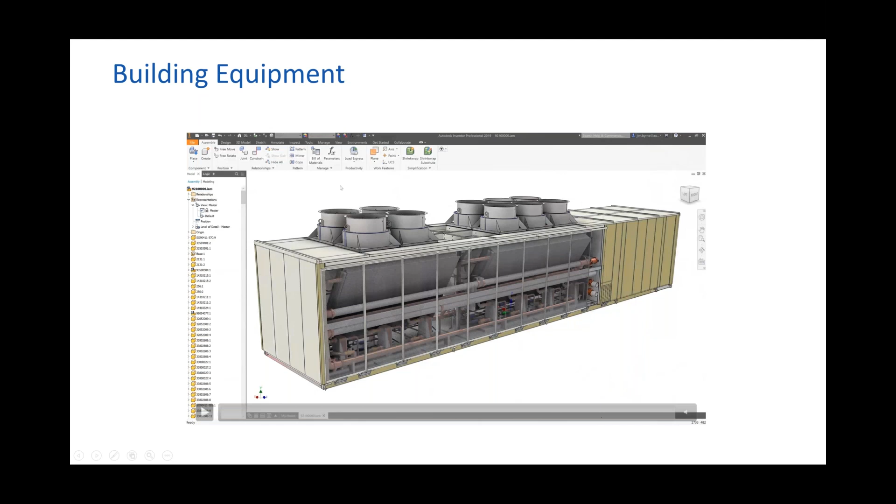So the first one, this is some functionality that we added some time ago, and it's really taking that highly complex product, simplifying it, and being able to put it on or in a building. Now, oftentimes these are kind of configured objects. It's not something that is for the masses. It may be customized for an individual customer. So oftentimes there's specific needs around connectors and things like that, how this thing hooks up, how it looks, configuring it, lightweighting it enough to get on or in a building. And Inventor has some really nice simplification tools that allow you to go through, simplify, and kind of gauge the right level of detail for buildings.

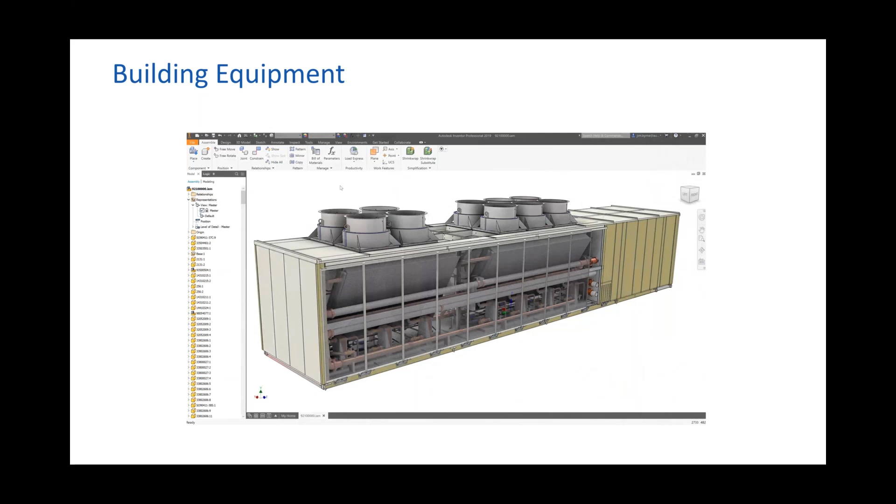And this has been something that's been a bit of a challenge over the years. The engineer typically has a lot of detail in this, and they need to simplify it adequately enough to go inside of a building. Those are things that we continue to try to work on to help both the engineer and the consumer of this find the right level of detail so that it doesn't bog down the building, but provides enough information in the building. I'm going to come back and talk a little bit more about some enhancements that we're doing here in the future. But Inventor has some great shrink wrap lightweighting tools today to do this.

And then you have things like product families, and these are very common things like doors, windows, chairs, furniture that you may want to be able to have configurations or families that you choose from when you insert it. So these are very standard sizes, very standard things that many customers would want.

And oftentimes these are done inside of Revit itself. So even if the manufacturer designs these in Inventor, many of our customers will have these generated in Revit as families if they want to be able to consume them in Revit. And a lot of that is being able to do all the configuration, being able to have all the options and the lightweight nature, materials, all of those things in Revit.

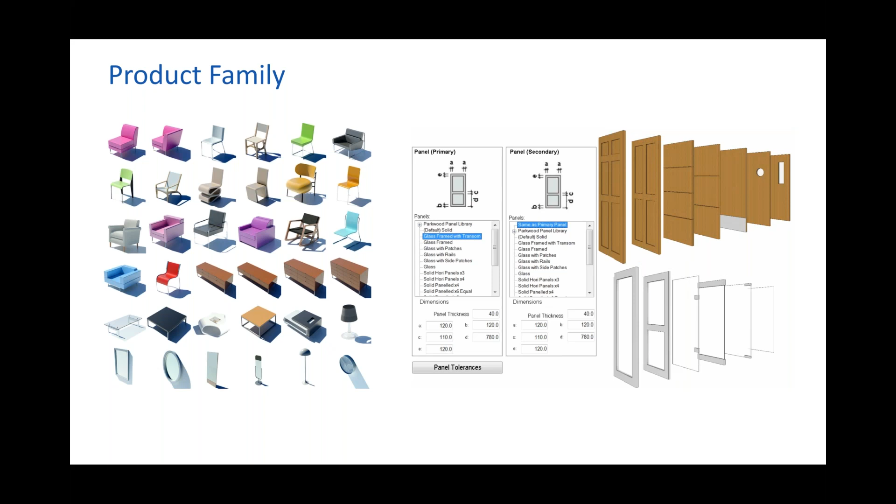So, kind of looking at this, depending on where you fall, you may use Inventor for the lightweighting and building these models. You may use Inventor to design a model and push it through Forge for the automation, or you may use Revit to design or have your product families that go inside of the building. So these are all important workflows. We're working a lot to get better integration between Inventor and Revit to help out with many of these workflows.

One such environment is modular and prefabricated construction. So we have a lot of customers that are doing things like these curtain walls or structural members that are unique size structural members, precast concrete, that are all very specific. They need to have manufacturable data and information around it.

But at some point, they need to be able to get it into the Revit model to represent that. And in many cases, they need the Revit model that it's going to be going into as a starting point. So before you build this steel member, you need to be able to bring in the Revit model to kind of figure out where the member goes, the size, clash zones, all types of things like that.

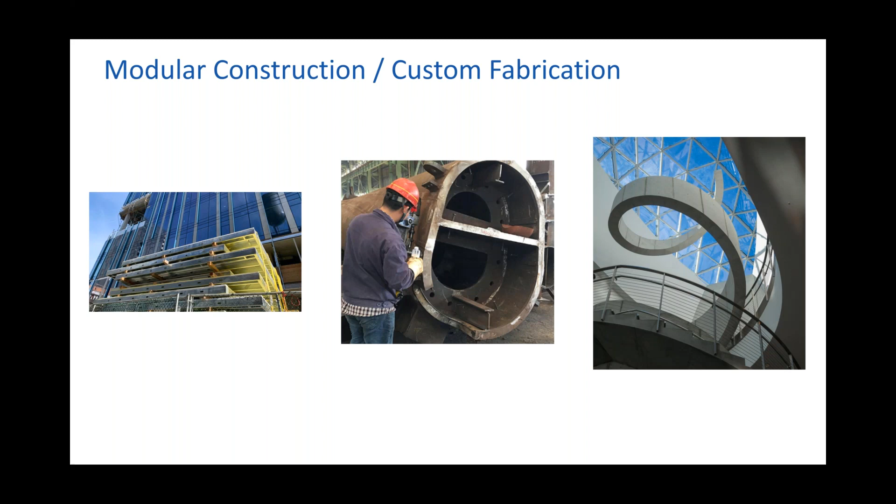So those are some of the things that we did in Inventor 2021, really focusing on Revit to Inventor. So allowing you to take just a native Revit file right from Inventor, open it up, or right from Revit, open it up right inside of Inventor with some options to be able to bring in just what you want. That really supports some of the prefabrication construction type of workflows that we've heard about over the years.

This shows in Revit a larger building. You can see it's a pretty good sized building. But in Inventor, we just want to focus on one key area - there's a little owl's nest. It's a coffee shop, and we want to be able to do some work inside of Inventor for the sunshades around that.

So in Revit, saving this to BIM 360, you could save it local to a desktop. From within Inventor, you can browse out to BIM 360 or the local file, open it up. Once you open it up, it gives you some options of the 3D views that were created inside of Revit.

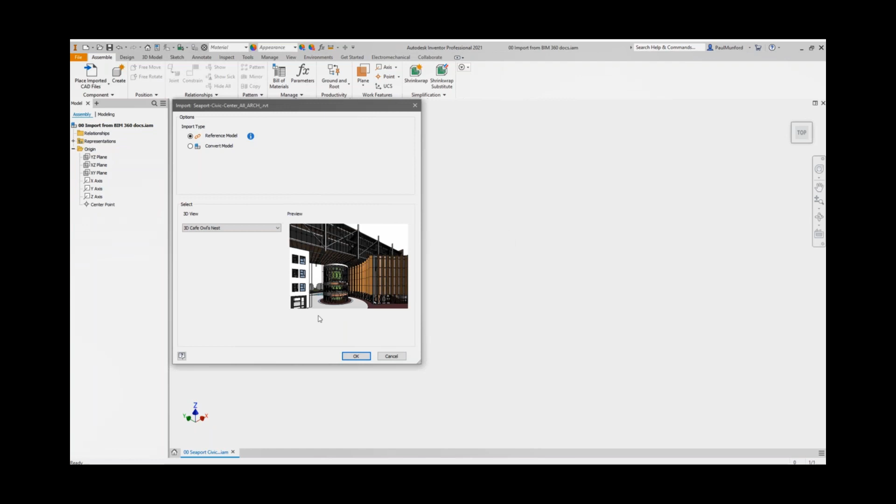So you don't want to open up that entire building. You may just want to be able to grab certain components of that. So you can use the 3D views to filter out just the area that you want to bring in. You'll notice in the browser, we've structured it so you can turn components on and off from the browser.

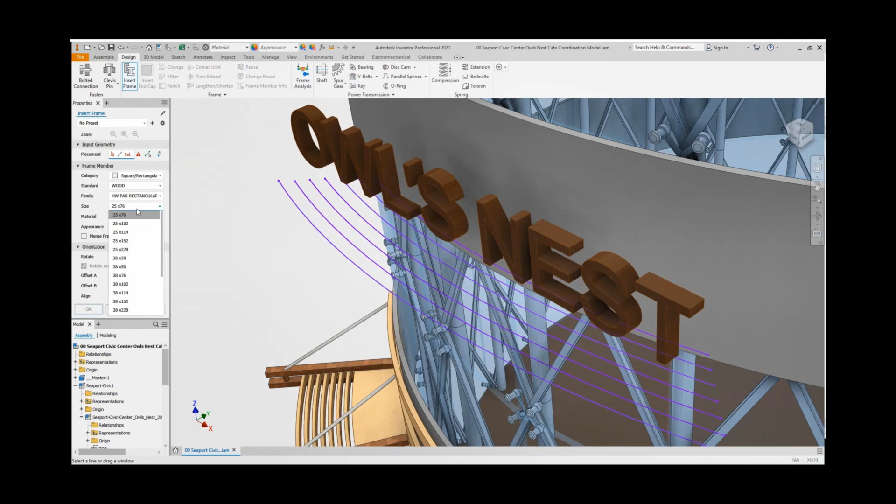So we really maintain a lot of the look and the feel, the same material colors. And then from within Inventor, being able to utilize a lot of our rich manufacturing tools, we've designed a sunshade up above. There was a part of a sunshade that came in from Revit itself, being able to put some of these manufacturable components in there, creating detailed drawings around that.

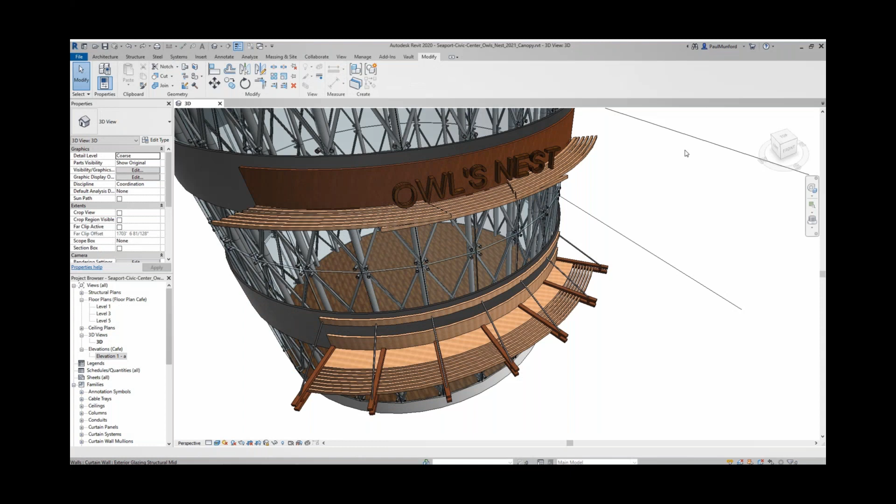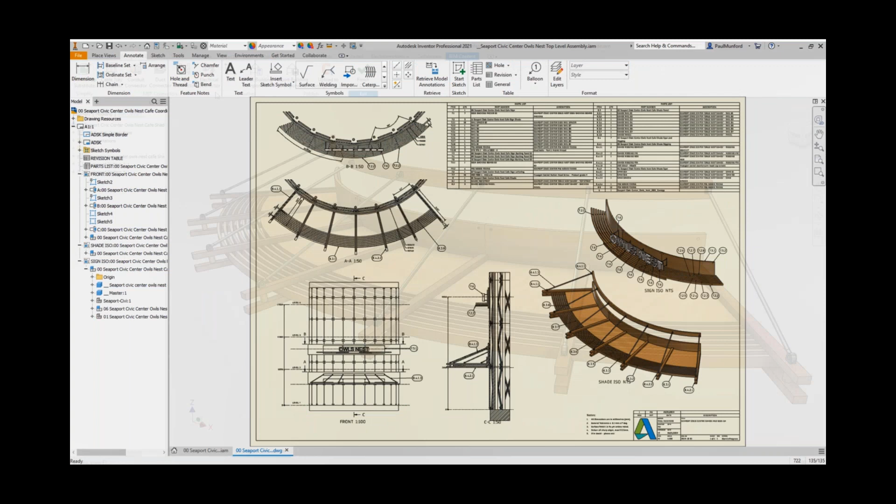So really being able to leverage both Revit and Inventor together, likely with two different teams. It's likely a pre-bid architect that's doing some of the early concept of the building, and then as it gets into more fabrication, passing that off and allowing a design engineer to come in and figure out what's going to work, what's going to fit, looking for structural integrity.

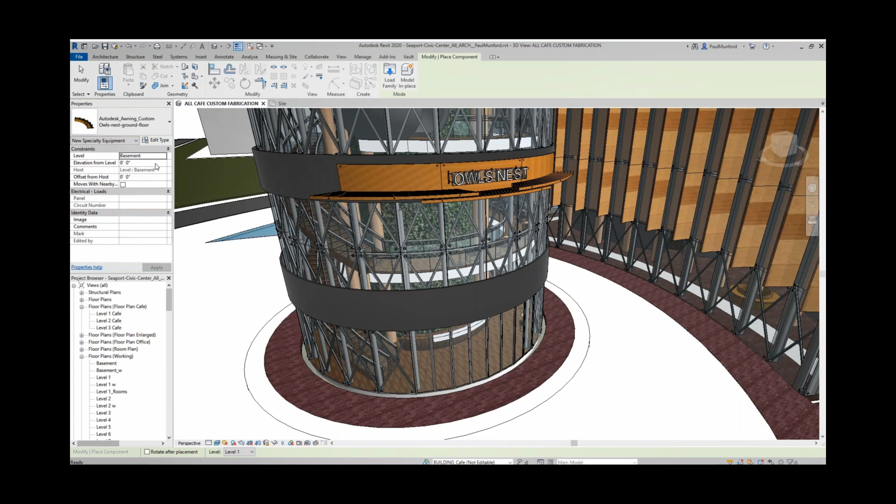And then as design changes happen, it may be that in Revit, that owl's nest changes in some way, being able to re-update that in Inventor, see what those adjustments do to the 3D model, update it in Inventor, and then work downstream. So then this is really the round-tripping, bringing that Inventor model that was designed in the owl's nest back into Revit to be consumed in the final Revit model.

So we started out in Revit, brought some of that geometry into Inventor, designed and worked with that in Inventor, and then what we did in Inventor, we lightweighted that and brought it back into Revit. So those are the type of workflows that many of our customers have been looking for over the years, really being able to tie these two products together much more closely.

That's something that we're working with the Revit team a lot. I'm on the Inventor side. We work very closely with the Revit team in these different workflows and tying these things together a lot more.

Now, with that, also what about the other way? So talking about some future things that we're thinking about. Everything up till now has been previous in the product or just added into Inventor 2021. Some of the things that we've had customers talk to us about over the years is better simplification, better ways to lightweight a model, and what are some things that we could do there. So I'm just going to hit on some things that we're thinking about.

Really looking at finding faster ways to create simplified models. So you saw the geometry that we brought in from Revit - we built that sunshade and then pushed it back to Revit. Well, faster ways to be able to simplify that sunshade to a lighter representation and be able to bring it in very easily. Also the ability to export native Revit files.

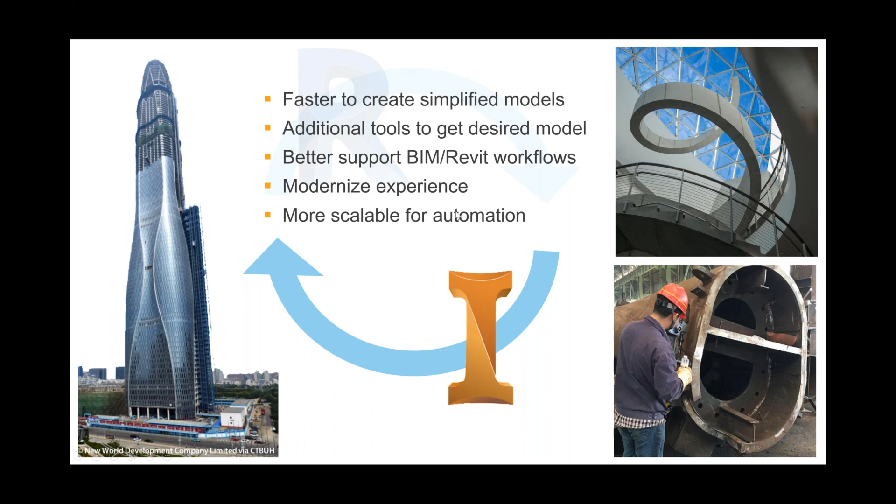If we look at the interface of what this might look like, going into some of the new property panels in Inventor, you can see an updated simplification experience all integrated into one place. You would choose that preset, then go in and include and exclude whatever components you want to see, in this case with options to filter by size.

Now, some of these options have been in the product in the past, but they were in a couple of different places. So one, we're looking at streamlining that and making it a lot easier to go through in one spot, and also adding additional options to provide more of what our customers are looking for, like including and excluding, and creating envelopes.

Envelopes can replace a complex object with a bounding box, a cylinder, or some other simplified geometry, so you can specify what components you want to put an envelope around, and also remove some detail.

You may want to remove holes, fillets, and things like that. We're also looking at removing things like embosses, so if you have embossed text on something, we're looking for ways to remove that to simplify it. We may not need to see a part number, decal, or logo in a simplified state.

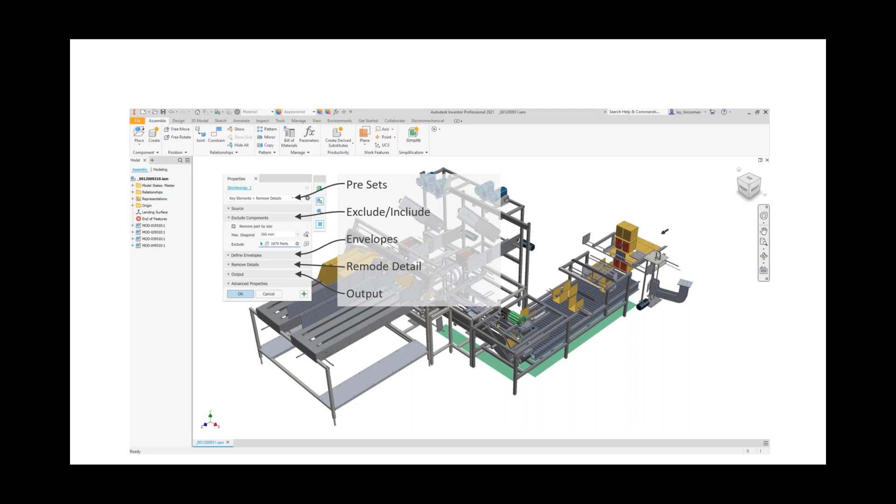Custom fabrication for Inventor 2021 allows you to bring the Revit model directly inside Inventor, and then do all the detailed modeling and everything you need inside that Revit model much, much more easily. Also, one of the things we're working on is linking origins together.

So if you bring in a Revit model, it knows where to come into Inventor. You create geometry in Inventor and push it back to Revit, and it knows its orientation based on the Revit model brought in. So we're trying to be a lot more intelligent about things like that.

Modular construction: we have a lot of tools here too, and this is another area similar to custom fabrication, where you start out with a building from Revit, bring it in, and figure out how to do your modular construction.

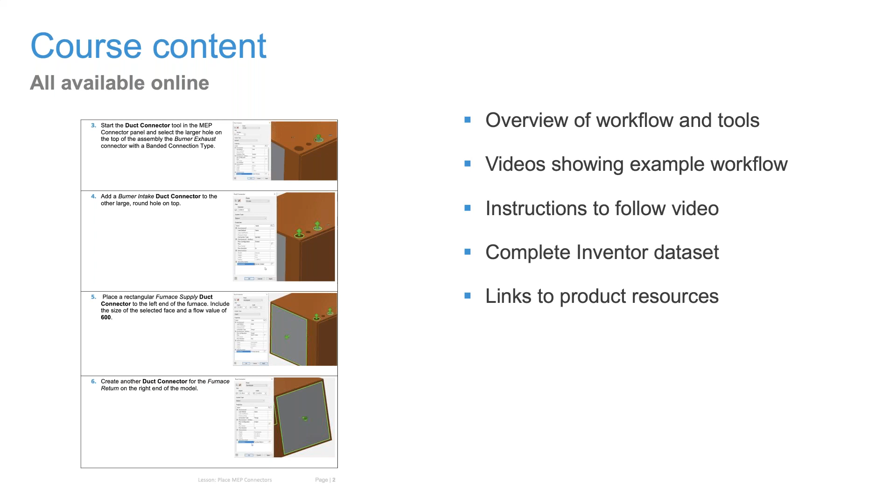Just as a quick example, I'll show you part of a video. This one, we'll keep the audio down, but we'll see here. There we go.

I'll fast forward through portions of it. So a quick overview of what the objectives will be.

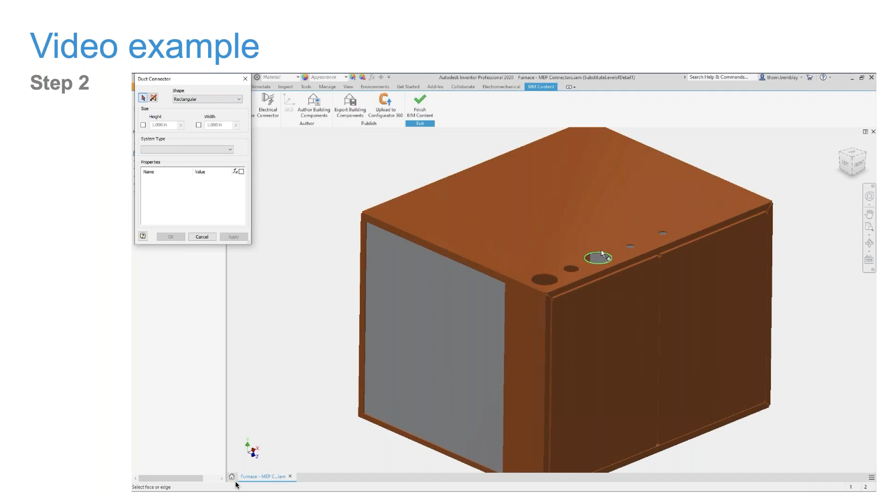This is step 2 of the lesson, where the model has already been simplified, so all of the internal components, the intellectual property, has been removed. It just walks you through the process of defining these MEP connectors.

The MEP connectors themselves are extremely flexible as far as being able to define shape, size, and add more important attributes. Let me jump ahead a bit here, where you're able to establish what the direction is. That's key for connecting to the BIM model.

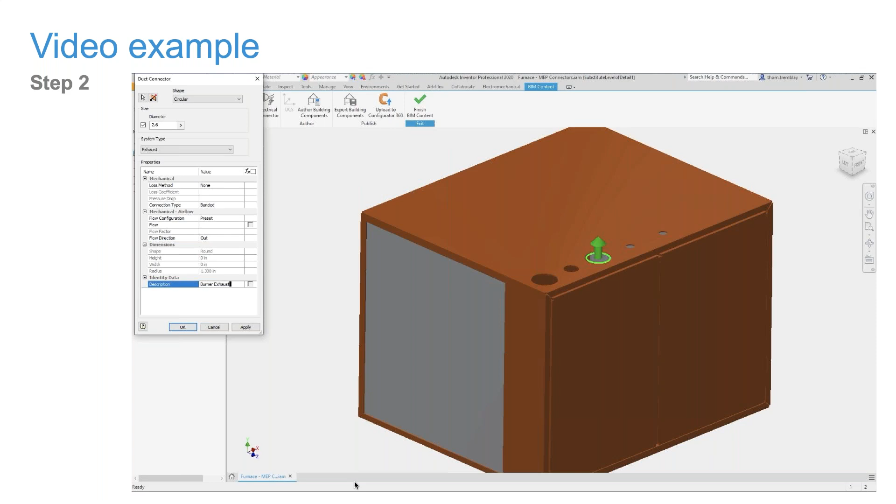The BIM model will then understand how fluid or air has to be flowing through it to make sure things are connected properly, so they don't design all the duct work or piping and then get your product on site and discover that there was a mistake in the planning process and everything is reversed.

So again, making your products more accessible to your customers. That's really the key focus for this portion of the course, just walking through these processes. The processes themselves are really straightforward. If you can put together an Inventor model, this will all seem very easy.

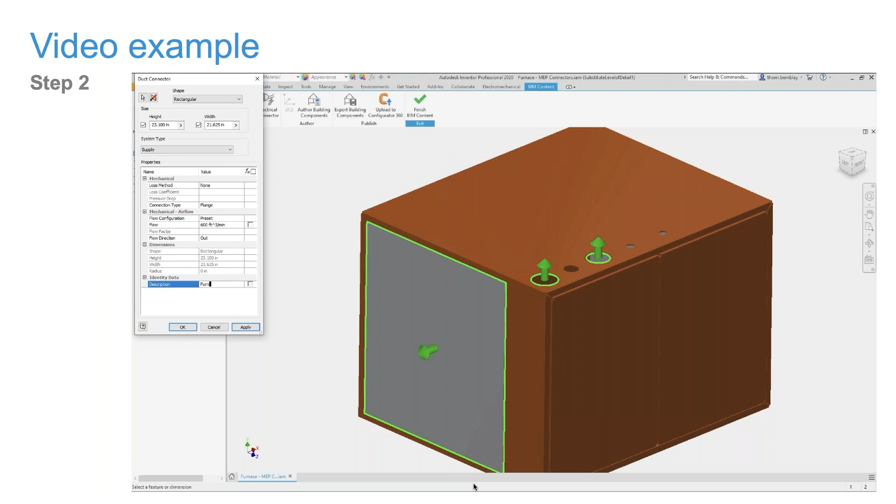Finally, on the back end, the Revit user or someone using the MEP technologies can easily pick up all of this information directly from your design and have the connections made automatically or nearly automatically. That makes it much simpler than sending them a step file or generic CAD data that they have to add a lot of intelligence to. So much easier to work with. It's a really nice way to engage with your customers.

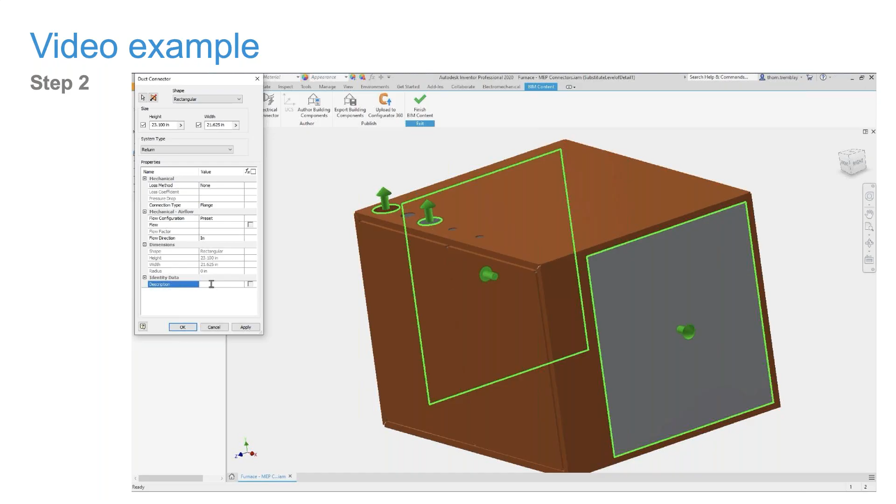This course, like I said, is very straightforward. We've also done several other courses around Inventor and different technologies - Inventor, AutoCAD Mechanical, some of the other tools. On the customer success site, a link has been put up directly to the course in the chat window if you want to take a look at that.

Some of the other courses we've put out are around AutoCAD Mechanical, one of the great secret tools of Autodesk. If you are working in 2D and doing anything related to machine design, you really owe it to yourself to take a serious look at AutoCAD Mechanical. It's a phenomenally productive tool. It does things that frankly are kind of magic in a 2D environment.

Anything created with AutoCAD Mechanical can be viewed as though it were just a regular AutoCAD drawing by the people downstream from you who need to work with your deliverables.

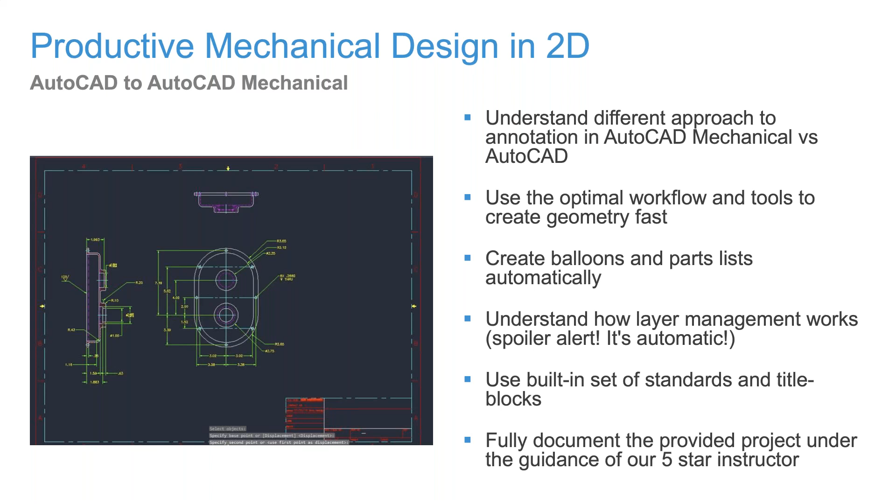We also put together a quick course on using some of the machine design elements using the design accelerators inside of Inventor. You might notice, if your eye is really quick, that it's even the same data set as the AutoCAD Mechanical course, or at least the same basic design. So if you are working in 2D and AutoCAD Mechanical piques your interest, you might want to take a look at how the process is done in Inventor.

A lot of people still using 2D think that 3D is just too hard, or that they'll have to model every little detailed element inside their design. Tools like the design accelerators, and the content already in Inventor, really do save you a lot of time - not just with basic nuts and bolts, but far more complex structures like gears, bearings, and all the purchase components that typically go into a machine design. So this is a great course to introduce you to some of those concepts.

It's not just for the 2D-to-3D transitioning user - it never fails that when I show design accelerators to a group of very experienced, long-time Inventor users, they're shocked to find out that these tools have been in the product for right around 15 years now.

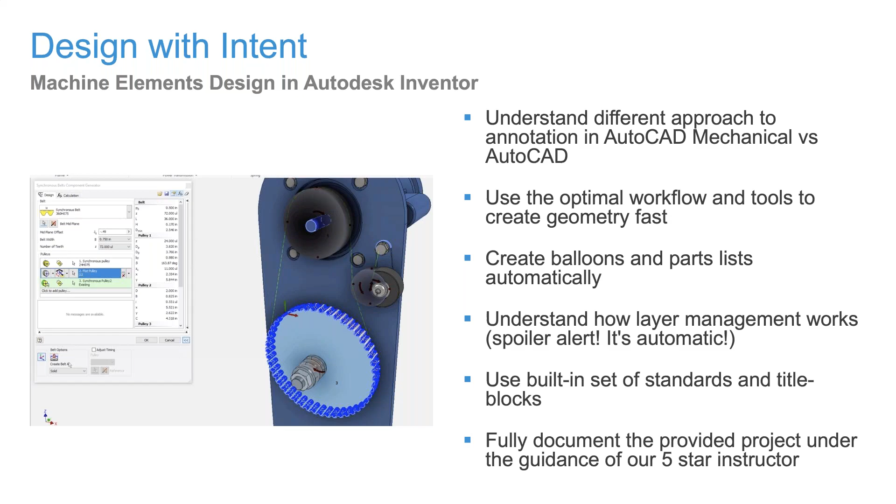Take that, Tom, and thank you so much for your presentation. So let me take it over and I will go full screen as well. Right, excellent.

As Tom mentioned, we released quite a few courses recently, and they're not necessarily focused on one product. We're trying to show the breadth and interoperability between different products. It's more focused on getting the results that you need, not so much on picks and clicks of certain products - so it's considered more as interoperability workflows or best practices to get things done.